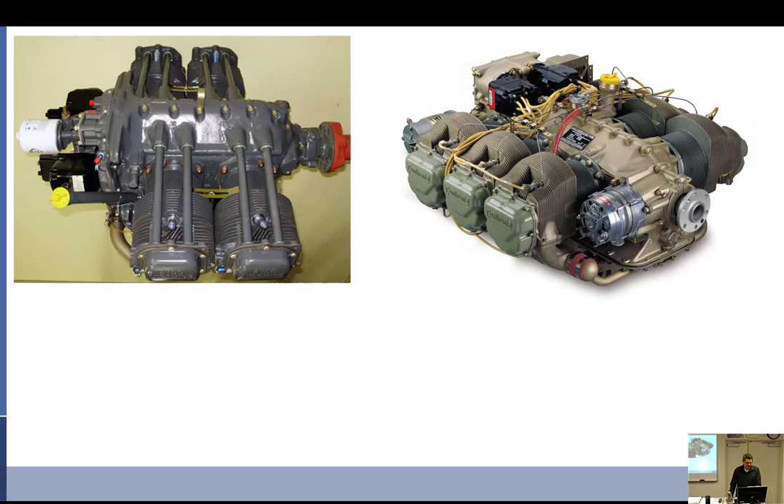All right. So there's a bunch of stuff you guys will be learning, so don't freak out.

All right. So that leaves us with moving on to something a little bit different. We're going to talk about engines. So now we're going to talk about compression. Compression ratio. So we're going to get into some stuff like this. Well, I will define it for you. The compression ratio. You know, when I say ratio, it should be the difference between two things. Is the ratio

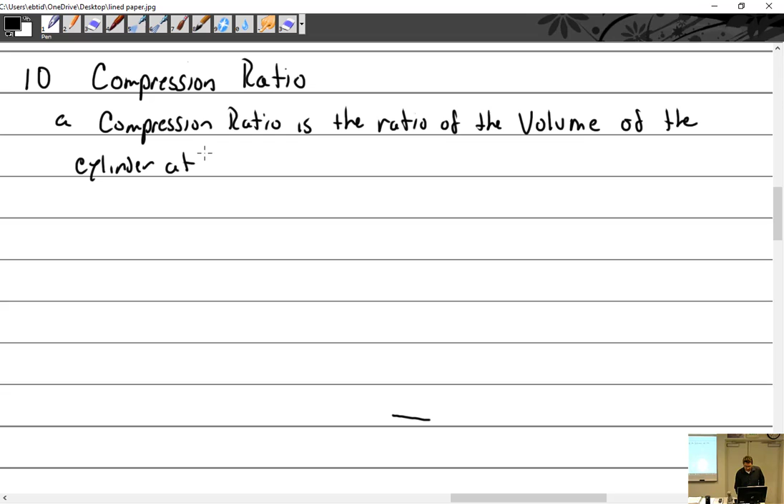of the volume, not how loud it is, but how much it holds, volume of the cylinder at bottom dead center to top dead center. So it is the difference of how much liquid, even though we put liquid in there, it's just easier to say liquid, how much liquid the cylinder holds when the piston's all the way at the bottom versus how much it holds at the top.

And a compression ratio is going to be a big deal to you as an aircraft mechanic. You don't get to decide what it is, but it kind of tells you a little bit about the construction and what's going on with it, what kind of fuels it can use. So let me see. Here we go.

Example, if a cylinder contains 50 cubic inches of, let's say, air at bottom dead center, and 10 cubic inches, inches cubed is cubic inches, at top dead center, the compression ratio is 50 to 10. Well, we don't say 50 to 10. You try and bring it down to 1 if at all possible. So if I divided both of these by 10, 50 divided by 10 and 10 divided by 10, I would get a ratio of 5 to 1.

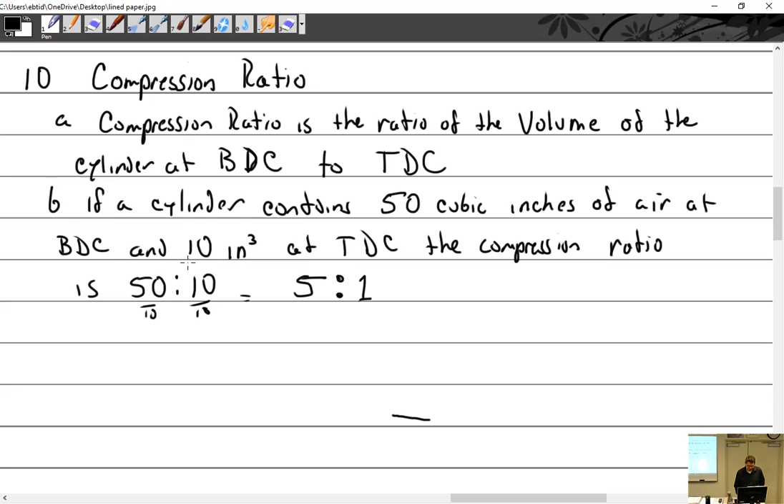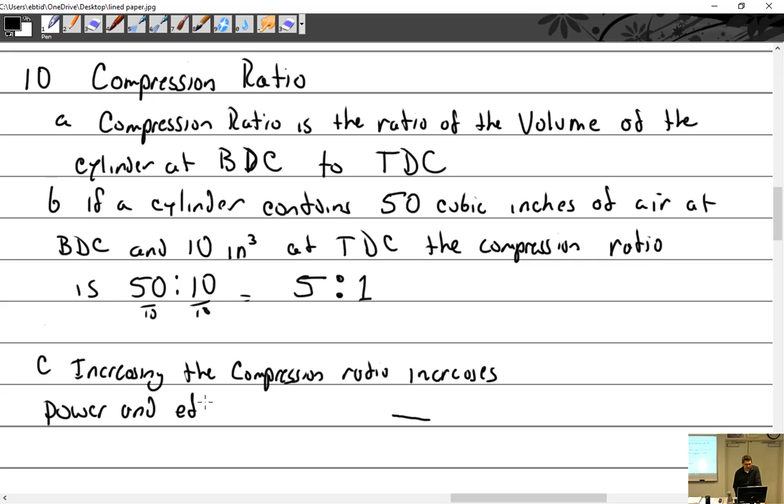All right. Increasing the compression ratio is sort of a good thing. It increases power and efficiency. But there's a trade-off. If you raise the compression ratio too high, the fuel can't handle it. So there's two things that are really a limiting factor. One is just the physical attributes of the engine. If the compression ratio is too high, you'll actually just blow the head right off, and that's bad.

Diesels have very high compression ratios. If you tried to run that same compression ratio in a car or even in one of these airplanes, you would have what I would say is a dynamic disassembly. That means it came apart. And then fuel. Fuel plays a big part in that too. When the compression ratio gets too high, the fuel doesn't burn, it detonates.

So we're going to talk a lot about fuels in the next class, but that's why when you go to the store and you have a choice between grades of fuel, it is not bad gas versus good gas. It's all the same gas. It's low octane versus high octane. So there's those people who say, well, it's my baby and I love my car, so every third tank I put in the 91 octane. It doesn't work.

And they drive a Corolla or something. Yeah, it's exactly it. Why do you drive a Corolla?

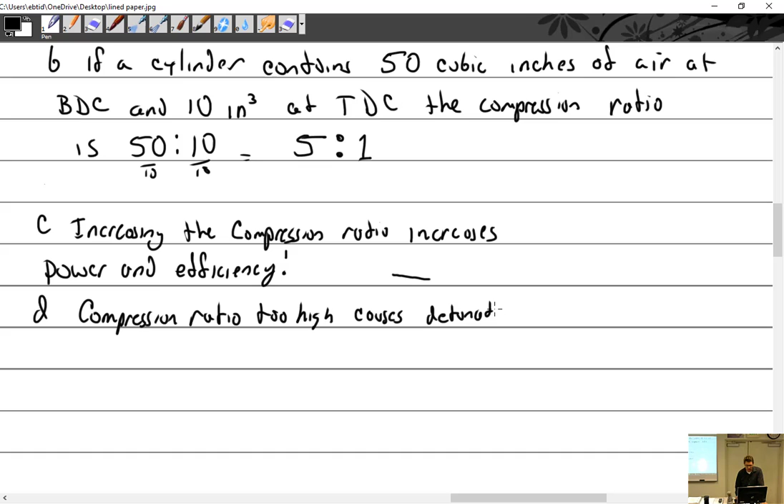Okay, so compression ratio too high causes detonation. Causes detonation of the fuel. Pinging. That is pinging. Detonation and pinging are synonymous terms. We just don't say pinging in aviation, but it's the exact same thing.

And you ever heard your car ping? Yep. Okay, so your car has a sensor in it called a knock sensor, and it hears that because it listens, and it detunes it, so it'll change the timing, and it'll pull things back so it doesn't disintegrate. You can't hear that in an aircraft because of propeller noise. So what you hear is the dynamic disassembly or the propeller stopping, and then the cylinder depart light. That's right. This comes on. Well, it's actually the piston melt light that comes on. Compression ratio too high causes detonation of the fuel.

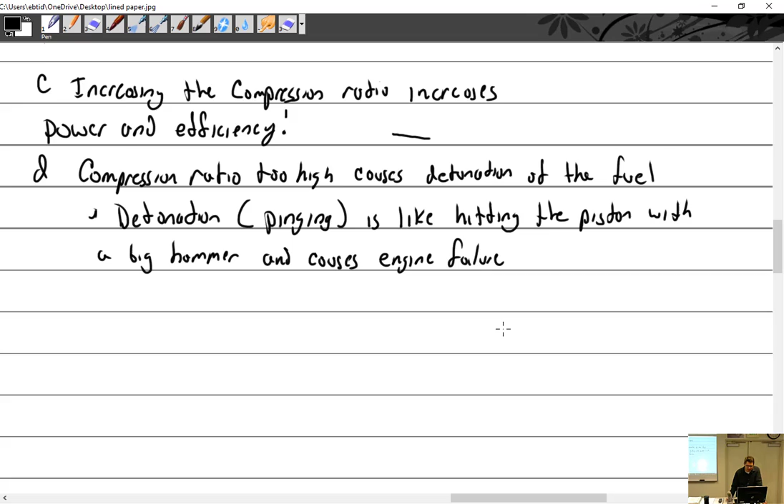And then, just so you remember, detonation. And I'll put pinging here. P-I-N-G-I. Pinging, so you get the idea. Oh, it's right there in my notes. Is like hitting the piston with a big hammer. It's even worse than that because it melts it. It has localized hot spots and causes engine failure. It's a very serious problem. You do not want that. Because if you're talking about an engine that's $20,000, $30,000 and you just pinged it to pieces, that's really sad.

So what exactly is detonation? Is that there's no combustion? No, it's the opposite. So in normal fuel combustion, it burns. It is actually a burning that if you slowed it down, you'd watch it light off and do an appropriate burn. Okay, detonation is an explosion. It's just a sudden bang. You don't want that. You want burn and push versus explosion. Explosion is detonation.

Is that why it's important to jet things to altitude? Well, we don't jet things in aviation at all, because we have a mixture control that the pilot can actually operate. So everything is jetted appropriately for sea level. Everything works at sea level, and then you manually lean it appropriately as you go. The exception to that is you can set the idle mixture.

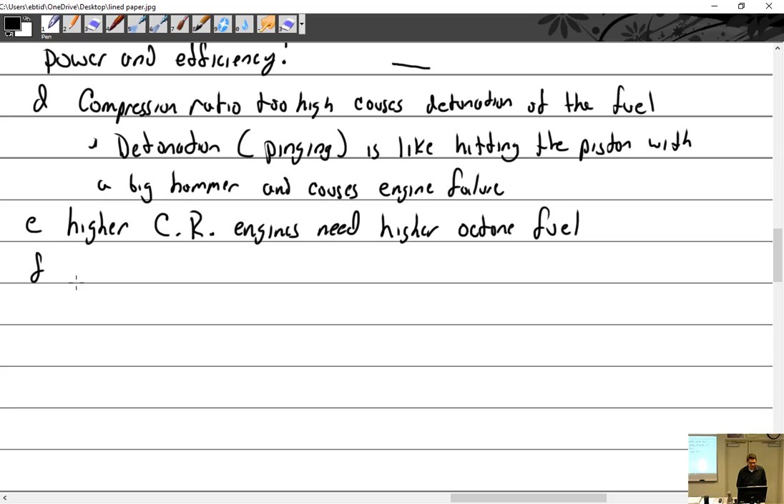So higher compression ratio, can I just put CR? Higher compression ratio engines need higher octane fuel. And again, we're going to talk fuel for an entire week straight in next class. So, anybody remember what the compression ratio of the Lycoming O-290-D is? 6.5 to 1. Wow, good job, because it says it in the magazine. And on the bottom of your pistons.

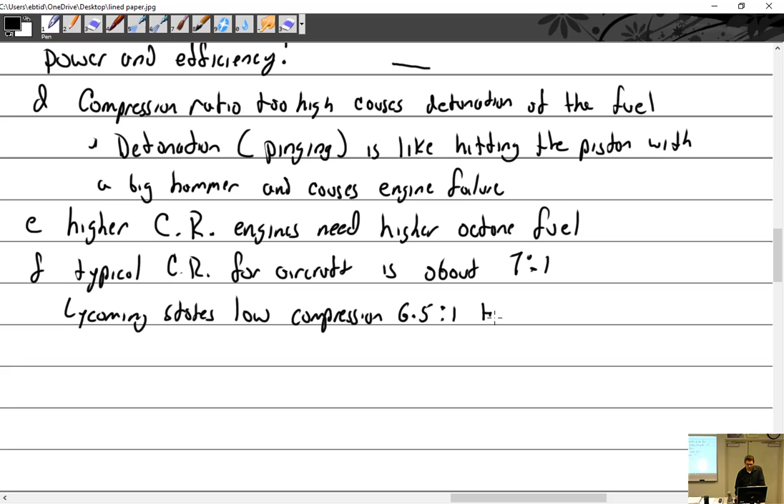So typical compression ratio for aircraft is about 7 to 1. Lycoming states that low compression is 6.5 to 1 to 7.9 to 1. High compression they define as 8 to 1 or higher.

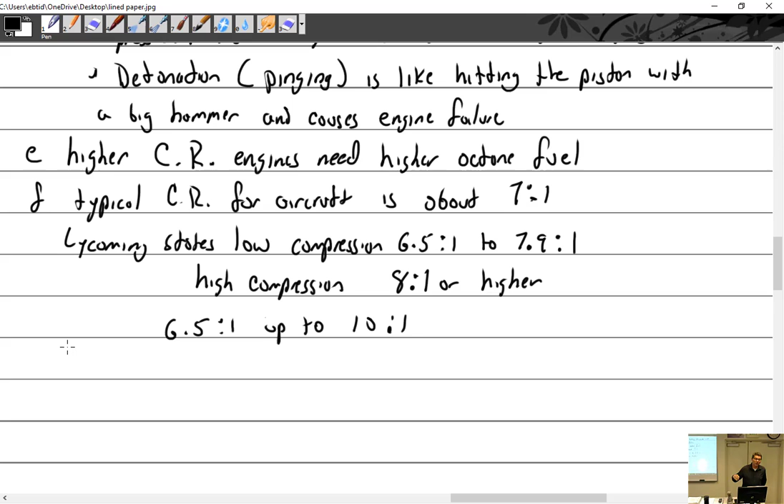And the overall range that I could come up with for Lycoming is 6.5 to 1 at the low end, all the way up to 10 to 1. Interesting thing is most turbocharged engines run lower compression ratio because of the forced induction. A couple reasons we can get into with a turbocharger, but number one, you're adding some heat in there, which I think might play a part. But two, because you're maintaining a constant boost, or it's actually boosting it in some cases, so they lower the compression ratio. All right, where am I here?

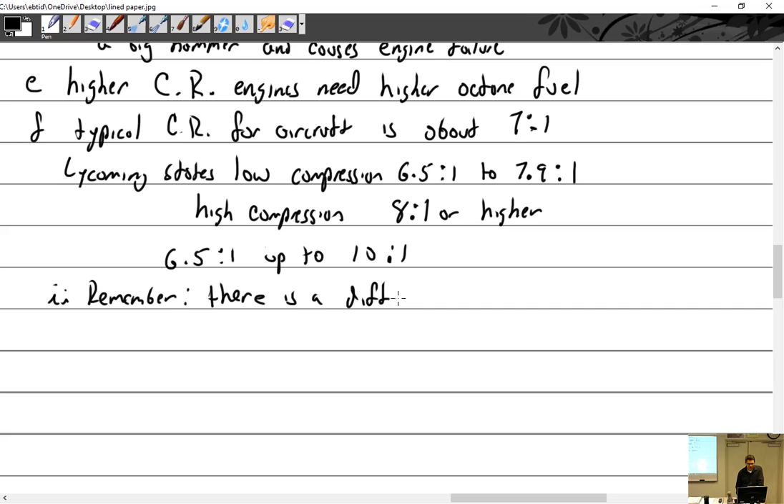A, B, C, D, E, F. I don't think we need to talk about. Remember, there's a difference between compression ratio and boost pressure. One is just the ratio, and the other has to do with absolute pressure. Well, maybe we can do that. So, okay, remember. I like it when I put remember, and it's something I never talked about. Like, you should know this, but you don't. Remember, there is a difference between compression ratio, CR, and boost pressure, which I can also say manifold pressure.

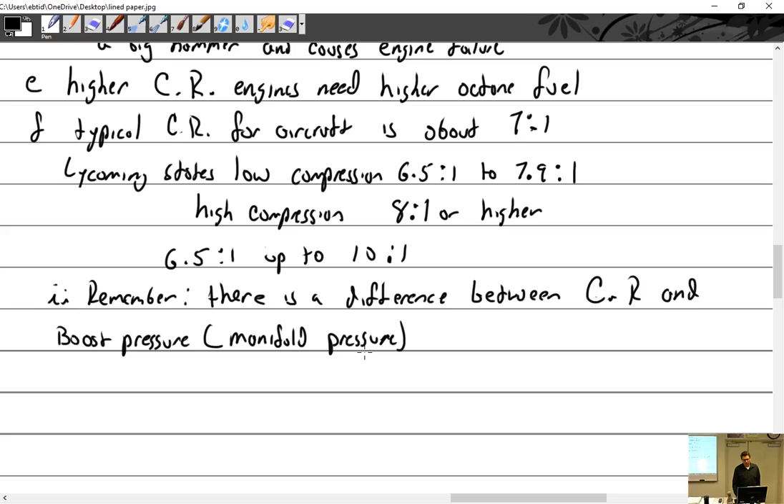So in aircraft, especially if you have a constant speed propeller or a turbocharged engine, and by the way, if you have a turbocharged, you can bet you'd have a constant speed, because it wouldn't make sense to have a fixed pitch if you're going to put a turbocharger on. But anyway, as a pilot or somebody flying a controllable pitch propeller, you add another knob. So not only do you have the throttle, which is the same as your gas pedal, but you also add a blue knob which controls the pitch of the propeller.

We'll talk about this more, it's going to be confusing. At one point while you're flying, the throttle no longer really controls RPM. Like in your car, the more you mash down on the throttle, the higher your RPM goes, right? But then it switches gears and goes down, which is almost the same as a propeller.

So you get to a point where the throttle still controls the throttle plate, which has a direct correlation to how much pressure is being allowed into the engine. And it's just manifold pressure, because it's a manifold, so we call it manifold pressure, intake manifold pressure. And then the propeller will control your RPM, so you can speed up or slow down based upon the pitch of the propeller.

So when we talk about compression ratio, remember it's the volume of two things. How can I change that ratio? There you go. Get a different size piston. That's exactly it. Get a different piston. So you've got to take the whole engine apart and change it. Okay. So if I want to change compression ratio, I have to buy new parts. Yes.

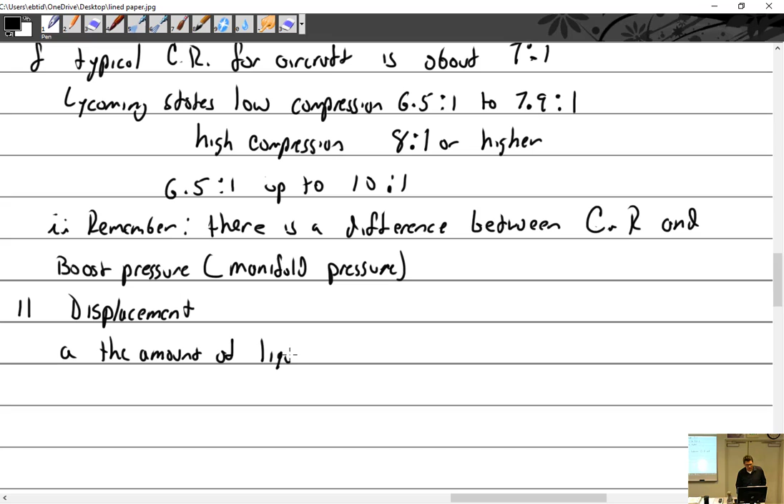Technically, it is the amount of liquid a cylinder displaces, which means pushes out, during one stroke. Just one stroke. Starts at the bottom, how much did you push out? All right. And you are going to have to do maths, and you're going to have to figure out displacement of engines. There are many FAA questions about this, and there's no reason why you can't just breeze through this.

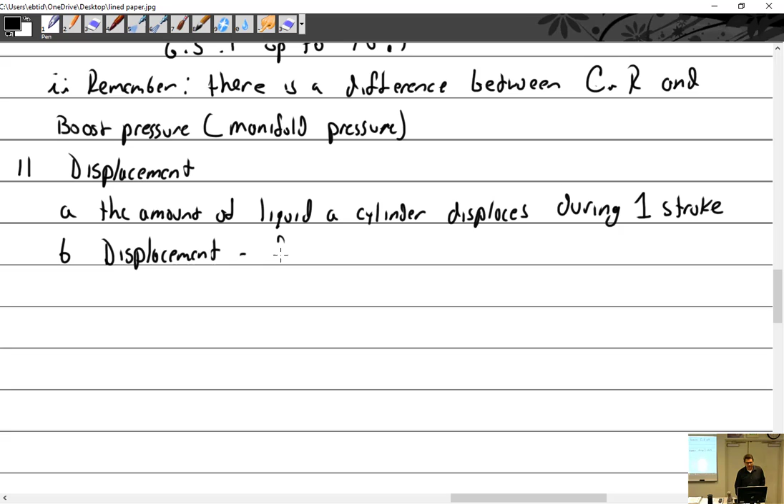All right. Let's see. I don't think I'm going to write that. I'm just going to do it this way. Well, okay, so to find the displacement of an engine, one, find the area of the piston. In other words, how many square inches are on the face of the piston? So how many little inches would fit on there?

And how do we find the square inches of a piston? Okay, it's area equals pi times the radius squared. And remember, we have to use Please Excuse My Dear Aunt Sally. We have to do it in the right order. And the order, Please Excuse My Dear...

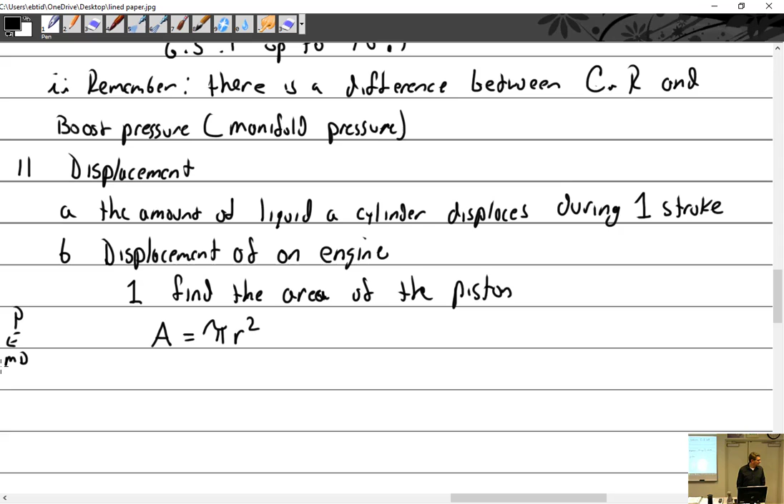We came up with a new one, didn't we? 309? Yeah. Please excuse my drunken, I don't know. Please, no, it didn't say that. Please Excuse My Dear Aunt Sally.

Okay, because MD and AS are equivalent. I wrote it like that. So it's parentheses, exponents, multiplication, division, then addition, subtraction. So are there parentheses? No, but there's an exponent, the r squared. So we're going to cover that. So find the area of the piston.

All right, then multiply times, I'm going to write out times, the stroke, and then multiply times, because what you did is you just found the cubic displacement of one cylinder. That's all you did. Find the area of the piston, multiply by the stroke, boom! That was the displacement of the cylinder. But what are we trying to find? Displacement of the engine. So multiply times the number of cylinders.

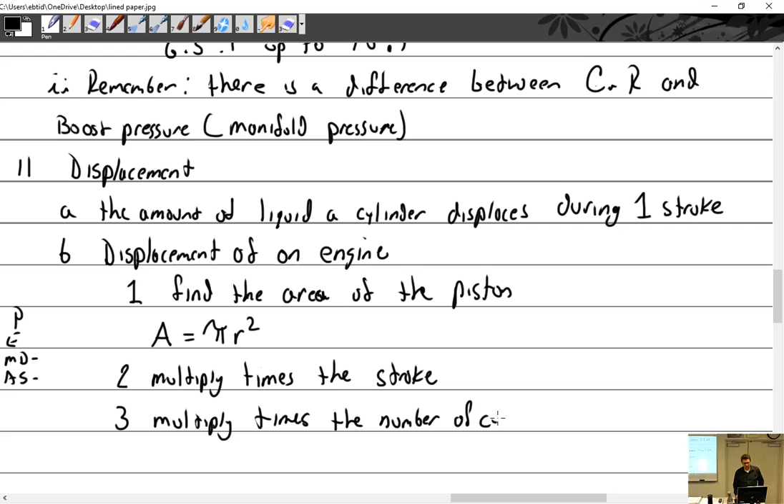Number of cylinders. I have to scroll up. There we go, number of cylinders. So let's try one. All right, so we have a 5.25 inch bore. It is a 4-inch stroke, and it is a 6-cylinder engine.

Okay, so the first thing we need to realize is I said the area is pi times the radius squared. We look at a cylinder, or a circle I should say, we need to remember that this is the radius. Red is radius. And this is the diameter. And they should be in the middle, sorry. Diameter. And diameter is synonymous, means the same thing in engines as the bore.

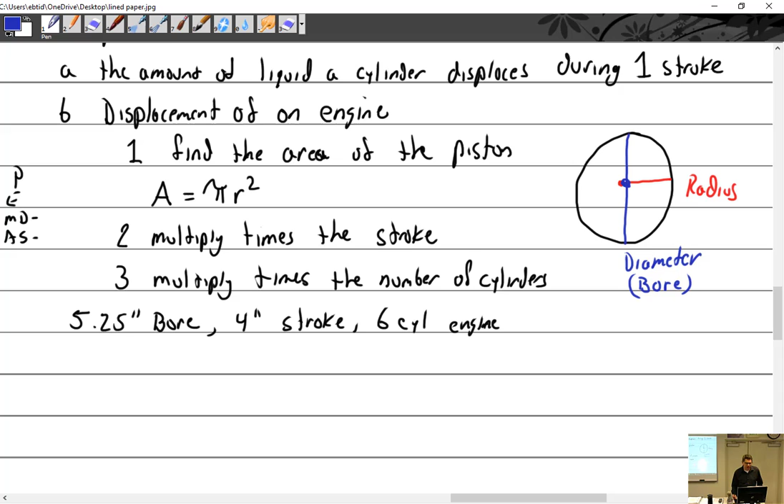All right. So first thing we got to do is we have to get this area equals pi r squared into something that makes sense to us. So it's area equals, I'll write it here, pi times the radius squared, but I gave it to you in the bore. So how do I find the radius off of that? I suppose I could write area equals pi times bore divided by 2 squared, something like that. But I hate doing that kind of stuff. So that's like radius squared. Let's change it to radius. So what is the radius here?

Oops. Area equals pi. I'll do it slowly. Times the radius. What's my radius? 2.625 squared. Okay, so I got that much down. What's my next step? I have to go to my calculator. What is the radius? It's 5.25 divided by 2, which is 2.5. What is it? 2.625 squared. I'm going to get my calculator.

Talk amongst yourselves.

Okay, once I've gotten around that little trick and remembered radius and diameter, because somebody's going to mess up on that, right? All right, stay with me. Ready? Got it? Okay, so we did 5.25 divided by 2, which equals 2.625. Now we got to square that, so we're going to hit the x squared button right here, and we get 6.89. Okay, so that is area equals pi times 6.89.

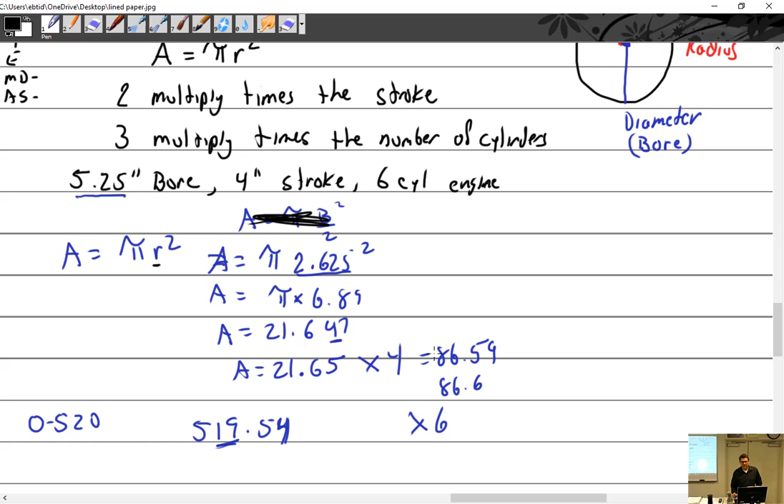Okay. Where did you get 2.625? Right here? Yeah. Okay, that's where I was worried I was going to lose somebody. Let me go back up a little bit. It is area equals pi times the radius squared. Okay? What is the radius? The radius goes from the center to here. That's the radius. The blue is the bore, or the diameter. So I told you that it has a 5.25 inch bore. Is the bore the diameter or is it the radius? Diameter. Right. And what does the formula ask you to use? The radius. So how do I get the radius out of that?

So you divided the bore by 2? Yeah. Because look, I'm just missing this part right here. If I did it all the way across, that'd be the diameter. This is diameter, that's radius. Bore, radius. So when they said bore, it's like diameter. They should have said that, but they don't. They say bore, because that's what we call it in engines. So you have to divide it by 2. Oh, okay. That makes sense. Now like I said, you might want to write the formula a little bit different, so that maybe you remember that. I just think it gets more complicated at that point.

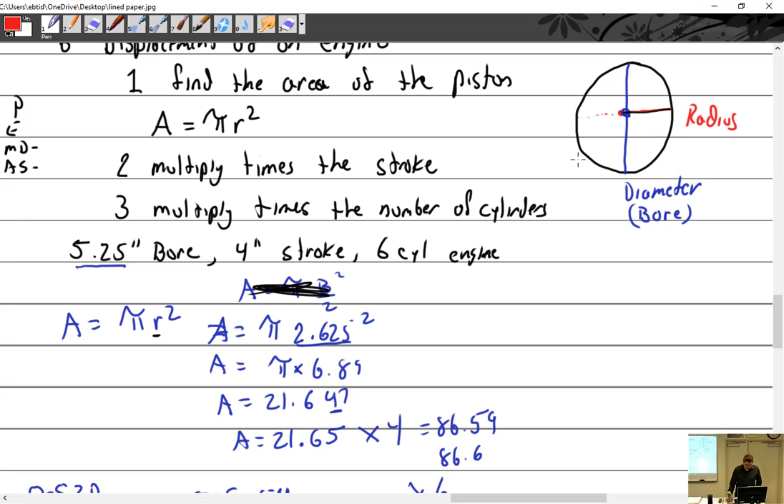All right, so what I'm going to do on that one, because it would just be redundant after that. So you just have to remember, convert the bore into the radius. That's the trick. All right, let's talk about horsepower.

Horsepower, or as a guy I used to work with would call it, horse pressure. How much horse pressure that thing got? So, horsepower is all about work. And what is the definition of work? Work equals force times distance.

I remember having lunch with my son when he was at school, and we were with his buddy in the cafeteria. And my son went to go take his tray full of dishes to the little place where you turn them in. And his buddy says, "Dude, take my dish. It's no extra work for you." Of course, you have to know my son. That is literally the definition of work. It is force times distance. My son is a math major. The other guy wasn't.

Okay, so we have work. That's our definition. Before we keep moving on, we have to talk about measurements. The first one is foot pound. A foot pound is 1 pound of mass, if I want to get technical, raised 1 foot. A foot pound is not the torque measure. All right, then we come back around to horsepower.

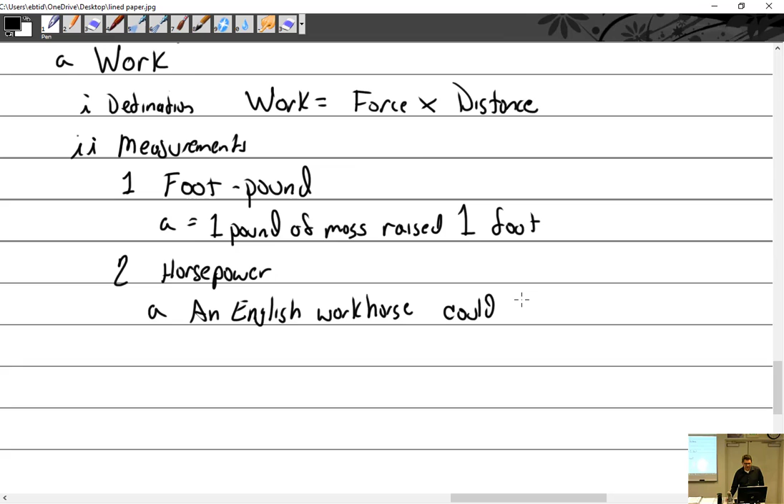So he figures out how much work his steam engine will do, but he uses a workhorse, and it's very specific. It is an English workhorse. Those are big horses. So he figures out an English workhorse could work at a rate of 550 foot-pounds per second.

Well, how much is that per minute? Times 60. 33,000. You're going to see this number a lot in formulas, like why divide by 33,000? I want you to remember this. It goes back to the English workhorse, 550 foot-pounds per second, or 33,000 foot-pounds per minute. That's foot-pound, horsepower. And then I think he sold a bunch of his steam engines because he could at that point.

So we have different types of horsepower. And the FAA does ask you about these different types of horsepower.

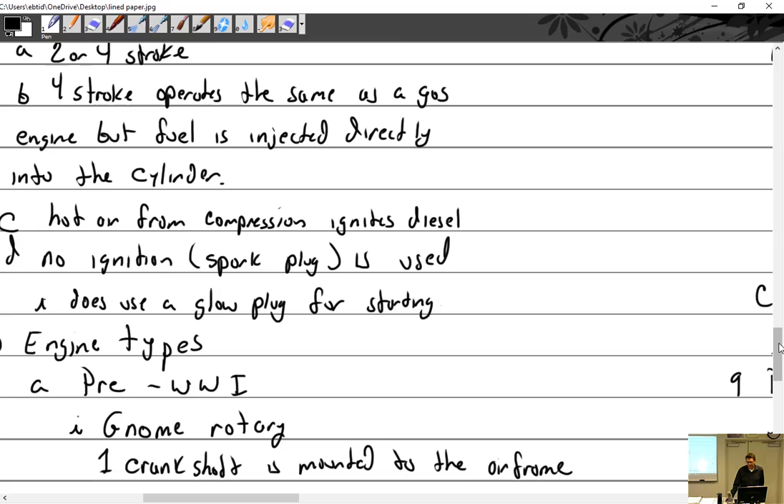Oh, I'm out of space. All right, everybody got this stuff? That's 10 pages of typing. I know, my hand hurts. Okay. It's all right, it's already typed out right here. I can just show you this.

All right, we have different types of horsepower. What kind of horse? Who cares? Indicated horsepower. Indicated horsepower is basically the theoretical horsepower created inside the cylinders. It's something I can come up with using math, and we're going to work through something in a bit. So it's power produced in the cylinders without reference, meaning not counting it, to friction loss.

What is friction loss? It's the horsepower lost through friction. The rings scraping the cylinder walls is a great place to start. Without reference to friction loss in the engine. So in other words, it is totally theoretical. It's not actual. It's a wish kind of horsepower. It's probably the way Volkswagen computes their horsepower. I'm just picking on them because of the smoke.

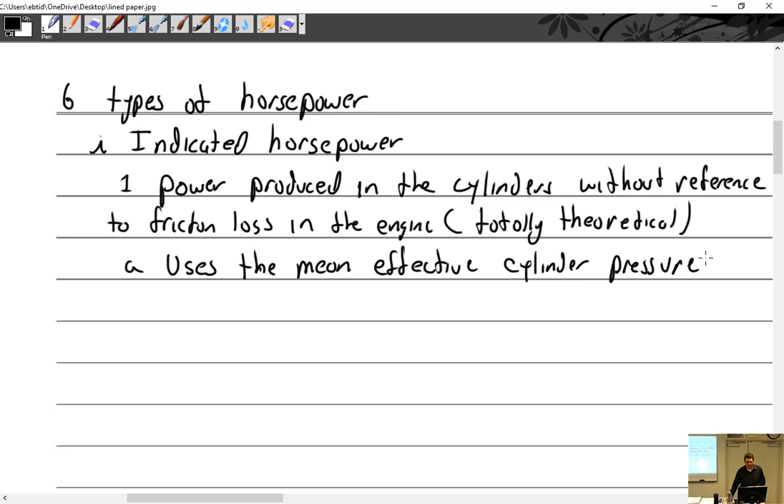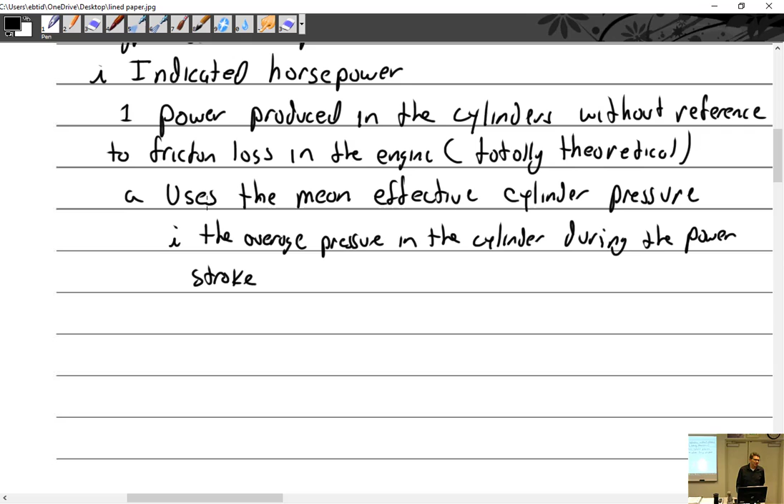Where would I get the mean effective cylinder pressure? Somebody has to give it to you. You can't put a gauge in there and try and figure it out. Don't even try. Well, maybe you can try. I don't care. That is the average pressure in the cylinder during the power stroke. Don't care about it the rest of the time because it's power we're after. So I don't care what the pressure is during the exhaust stroke because I'm trying to determine power.

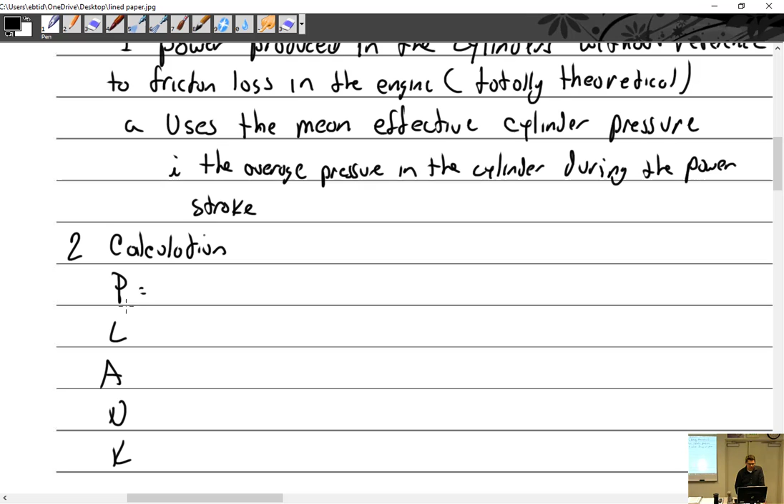All right, so it is done with the calculation. Why would you need to know something this weird? Actually, once you know the calculation and the things that go into horsepower, for me, certain things just clicked on. I'm like, oh, I get it. That makes perfect sense now. And I just hadn't thought about it. But the calculation is called PLANK. P-L-A-N-K, where P is the pressure, which is really the indicated mean pressure of the cylinder during the power stroke, so indicated mean pressure.

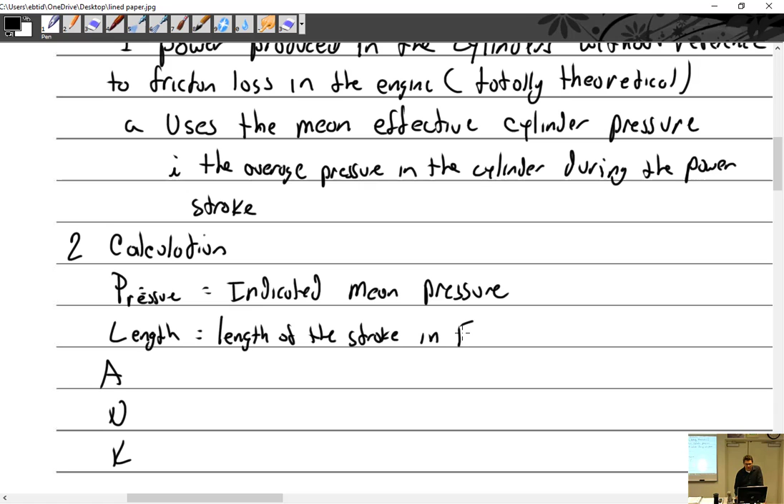L is length. Length of what? Of the stroke. Yep, length of the stroke, and you're going to love this, in feet. Just to be mean. I didn't make that up. So if I had a 4-inch stroke a little bit ago, am I going to use 4 inches? No. So length of stroke. A is the area, which is the area of the piston. In what? Inches squared.

N is the number of power strokes per minute. Now let me ask you this: if my crankshaft went around just twice, how many power strokes did I have? I had 1. So it is also the same thing as saying RPM divided by 2, or 1/2 RPM. Because the number of power strokes per minute is half of the revolutions per minute. So if the crankshaft went around 1,000 times in 1 minute, how many power strokes did I have? I had 500.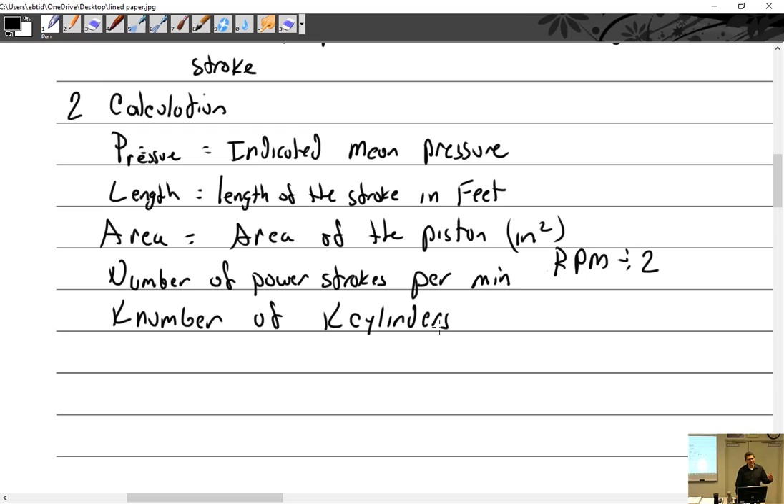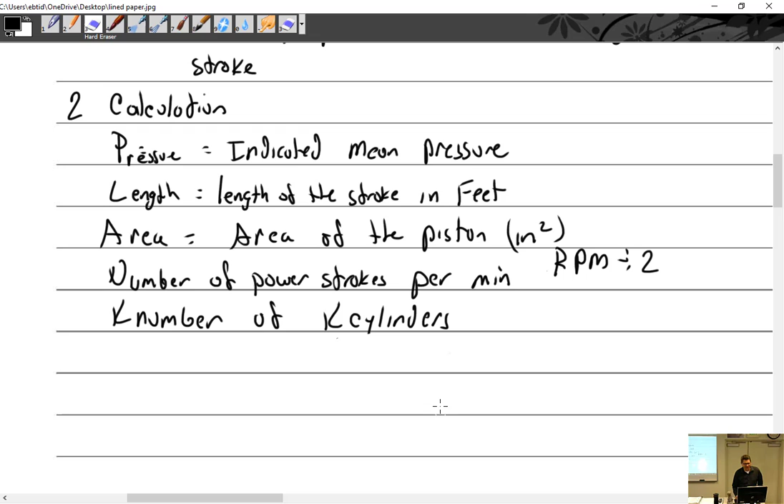And K is the number of cylinders. You laugh at me, but now you won't forget that. It is the number of cylinders. Maybe I should just spell cylinders with a K. K-Y-L-I-N. How about PLANC with a C? Because that's not how you spell plank, so you can't. It's PLANK, so it's the number of cylinders. Sorry about that. It just is.

All right, we have enough time for one example. If I have a 6-cylinder engine, it's got a 5.25 inch bore, with a 4-inch stroke. It is running at red line at 2,700 RPM. What else do I need up here? Pressure. Very good. It has an IMEP. What does that stand for? Indicated mean effective pressure. Of 160 PSI, which stands for pounds per square inch.

PSIG is pounds per square inch gauge. PSI is Pepsi. Oh. Just bring it around, guys. Second time around, I still fell for it. I did that like less than a week ago. I don't know.

All right, so my P equals PLANK. I'm just going to work it here. P is 160. The length is 4 divided by 12 equals 3. Wait, no. 1/3. 0.33. Right? 4 inches is 1/3 of a foot, not 3 feet. Area equals pi times the radius squared.